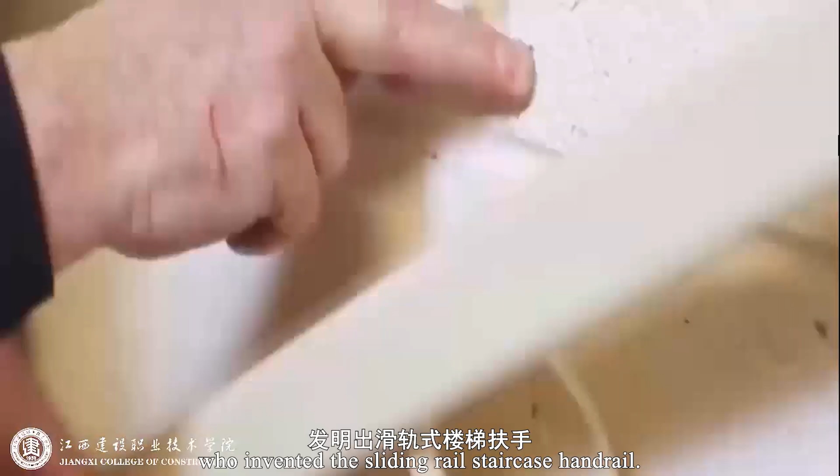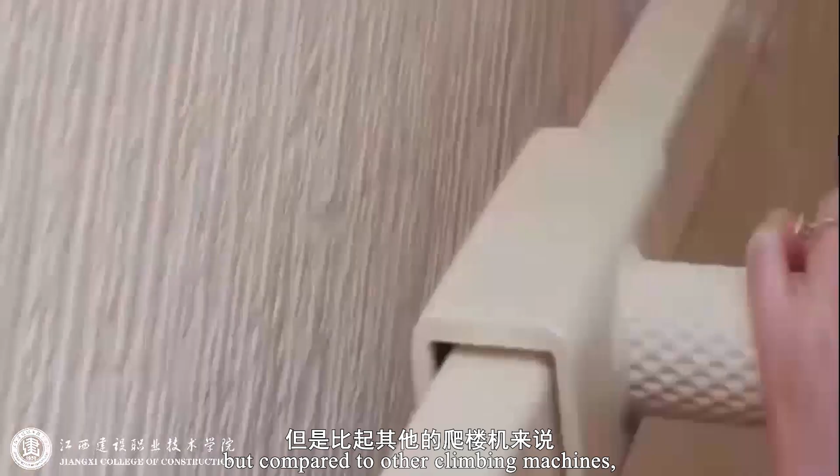There is a girl in the UK who invented the sliding rail staircase handrail. At first glance, her design is very ordinary, consisting only of fixed railings and movable handles. But compared to other climbing machines, it does not take up space and has lower costs.

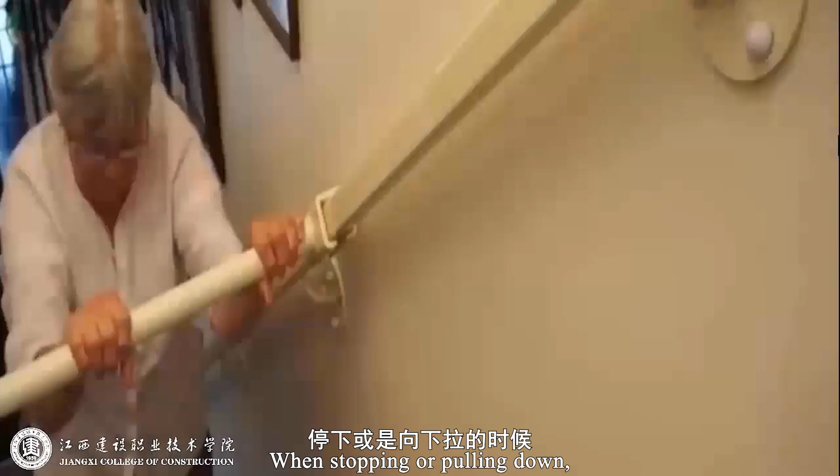When the elderly person goes upstairs and gently pushes, they can slide forward. When stopping or pulling down, the handle will get stuck and remain motionless, because there is a special card slot inside the handle, even if the elderly cannot stand firmly when going up and down stairs. As long as they hold the handle tightly, safety can be guaranteed.

The girl won the British Young Engineer Award from the British Medical Industry Association for this design. In fact, for handling the detailed structure of stairs, we have many other methods, which not only meet safety requirements but also take into account humanized design.

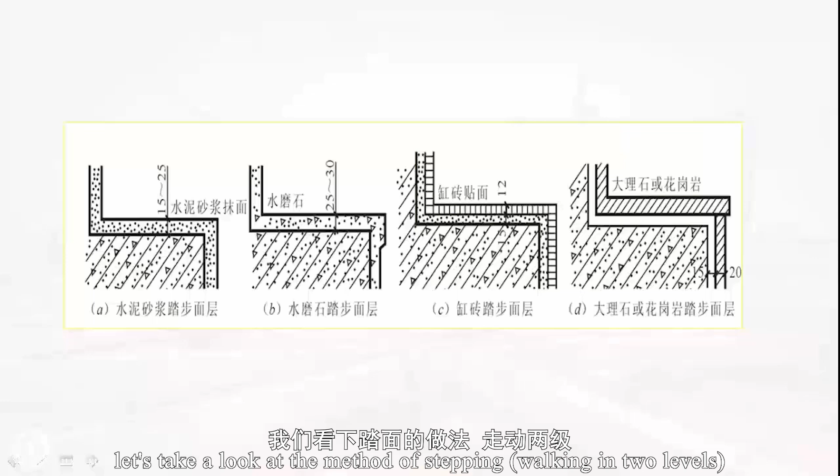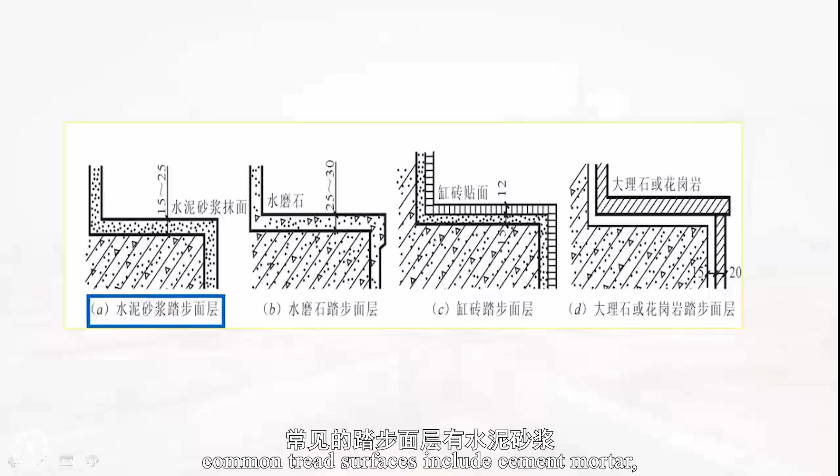Firstly, let's take a look at the method of stepping, walking in 2 levels. The method of stepping on the surface layer is generally similar to that of the floor. The requirements for the surface layer are wear-resistant, anti-slip, easy to clean, and aesthetically pleasing. According to the decoration standards and cost, common tread surfaces include cement mortar, terrazzo, floor tiles, various natural stones, and so on.

For stairs with high pedestrian flow, anti-slip and wear-resistant measures should be taken on the surface of the steps, usually by adding anti-slip strips at the corners of the steps. The 2 ends of the anti-slip strip should leave a gap of not less than 120 mm from the wall or railing board for cleaning and flushing.

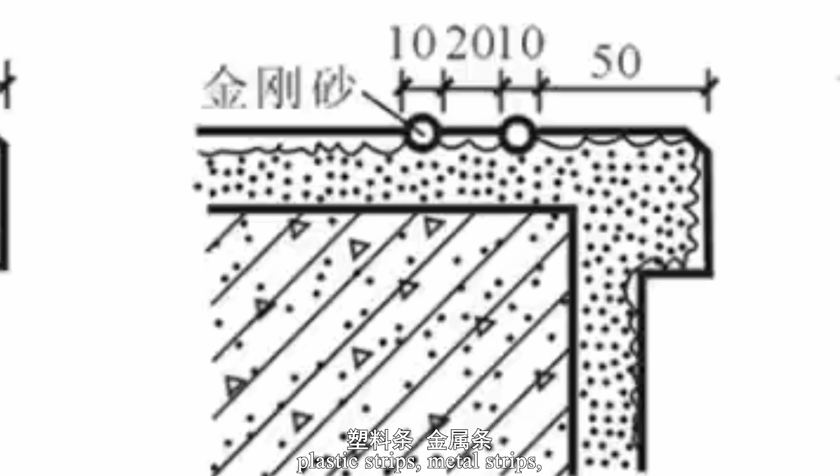The material of the anti-slip strip should be wear-resistant, beautiful, and comfortable to walk. It can be made of iron filings, cement, silicon carbide, plastic strips, metal strips, rubber strips, mosaic, and so on.

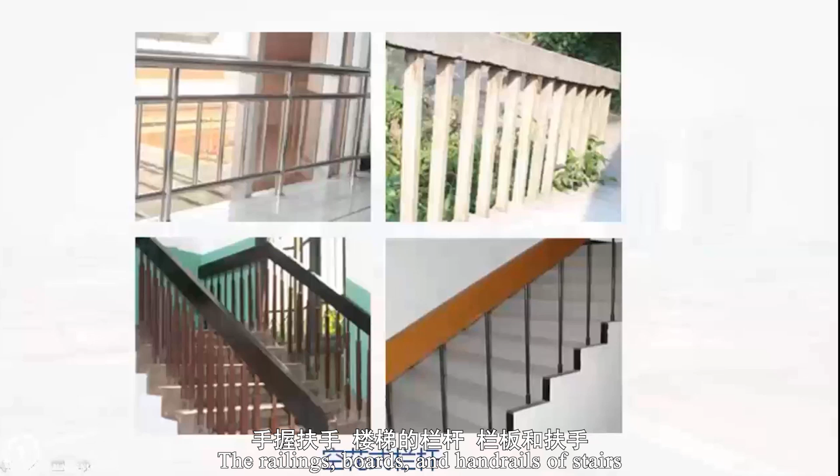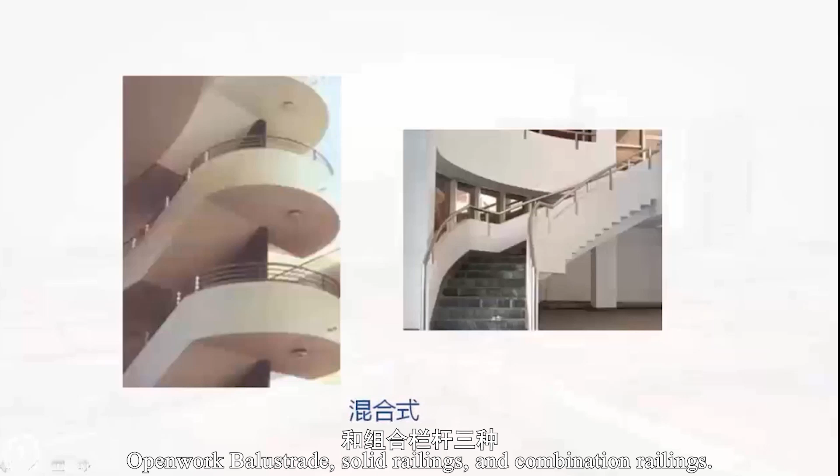The railings, boards, and handrails of stairs are safety facilities installed on the staircase, according to the width of the staircase, which are set on one or both sides, or in the middle of the staircase. They should meet the requirements of safety, sturdiness, aesthetics, comfort, simple structure, and easy construction and maintenance. According to their construction methods and materials, there are 3 types of railings: openwork balustrade, solid railings, and combination railings.

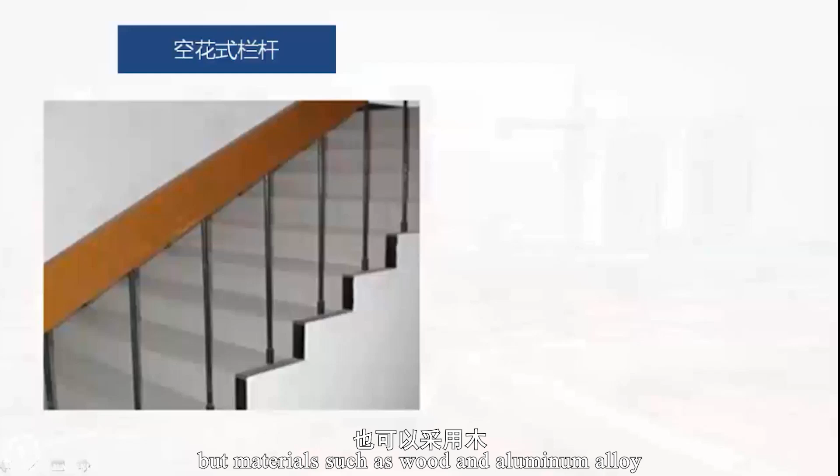Openwork railings generally use flat steel, round steel, and square steel, but materials such as wood and aluminum alloy can also be used for production. The size of the hollow flower formed by its rod should not be too large, generally not exceeding 110 mm.

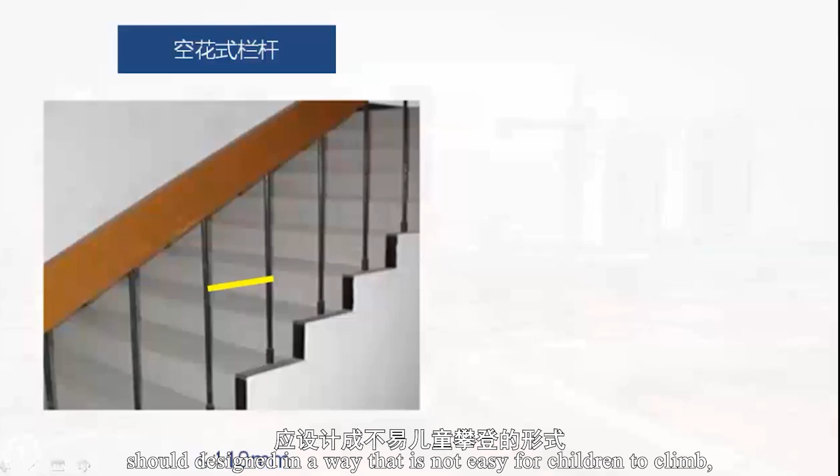For buildings with frequent children's activities, the division of railings should be designed in a way that is not easy for children to climb.

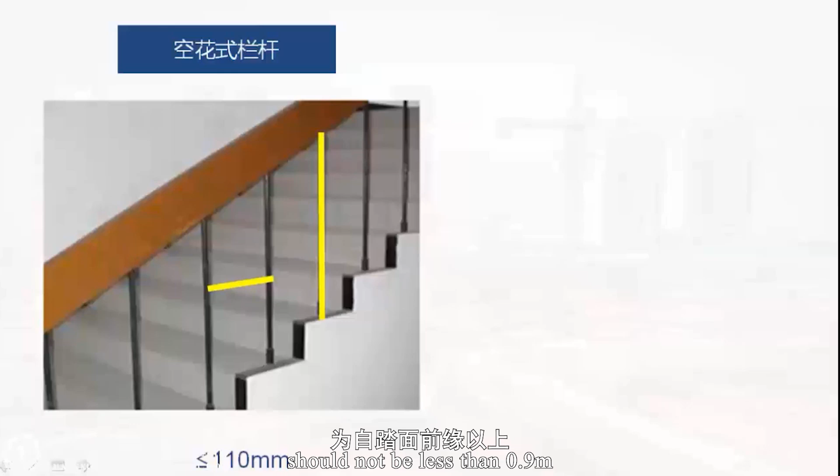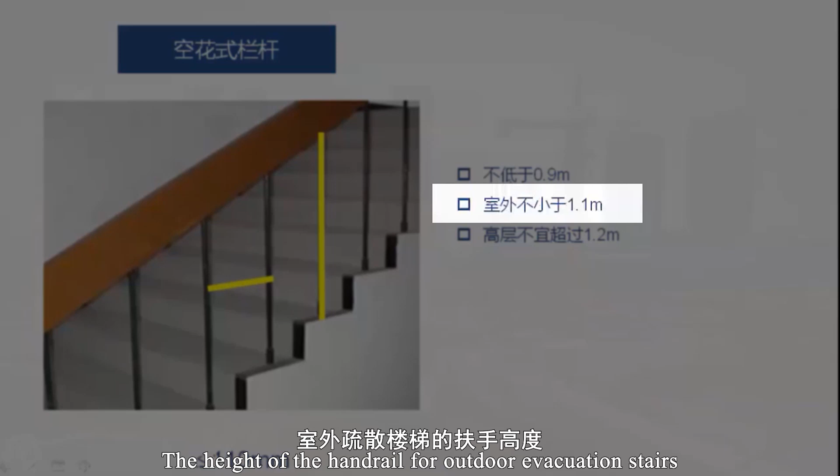To ensure safety, the height of the stair handrail should not be less than 0.9 meter above the leading edge of the stair tread surface. The height of the handrail for outdoor evacuation stairs should not be less than 1.1 meters, and for high-rise buildings, it should be raised appropriately, but not more than 1.2 meters.

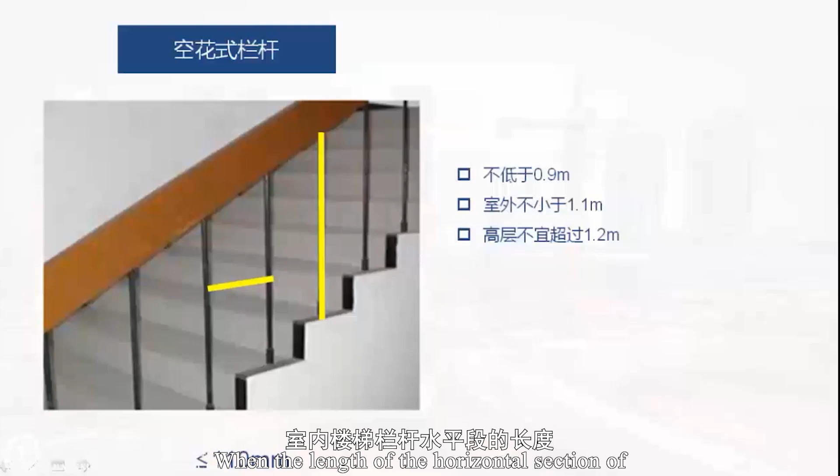When the length of the horizontal section of the indoor stair railing exceeds 500 mm, its height should not be less than 1.05 meters. The materials for the fence board are often bricks, steel wire mesh, cement plaster, reinforced concrete, and so on.

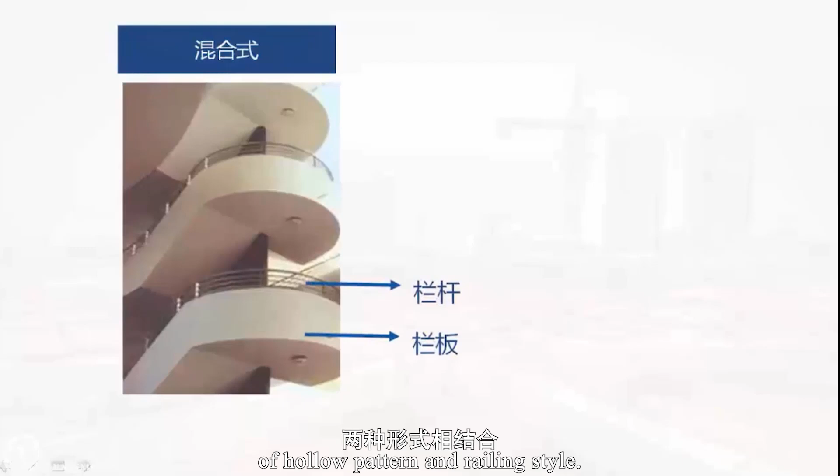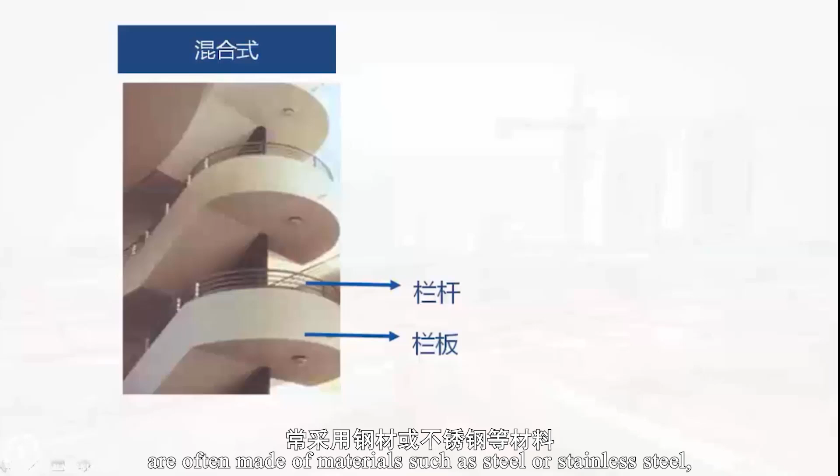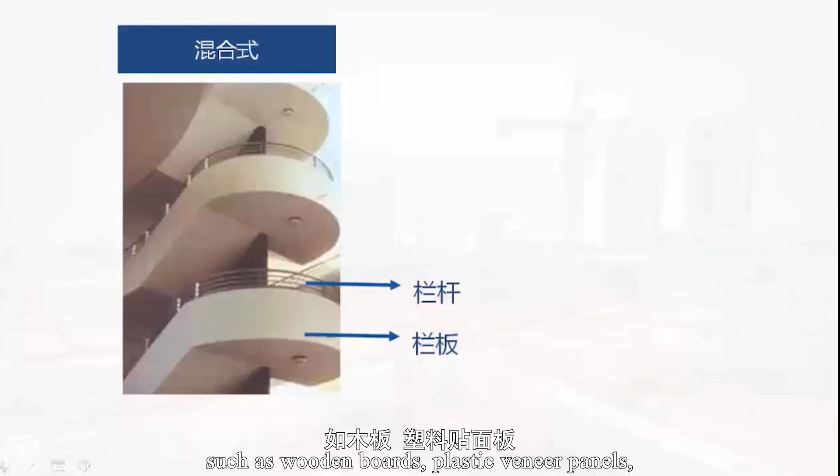Mixed type refers to the combination of hollow pattern and railing style. The vertical bars of the railing are often made of materials such as steel or stainless steel, and the railing board part is often made of lightweight and beautiful materials, such as wooden boards, plastic veneer panels, aluminum plates, organic glass panels, and tempered glass panels.

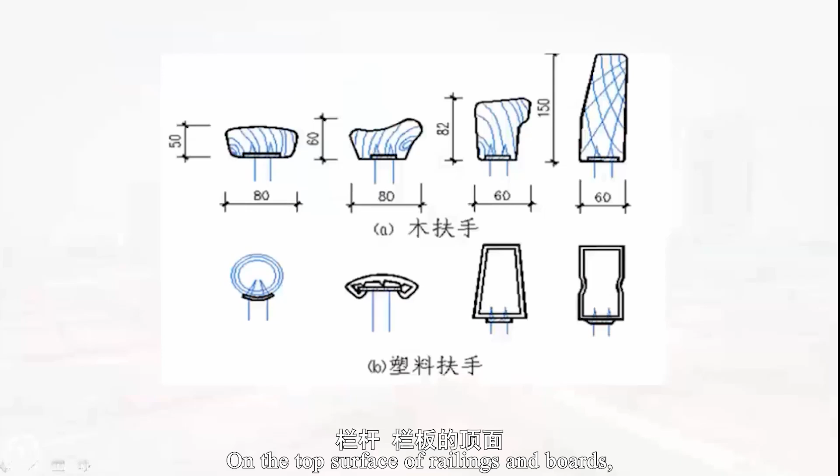On the top surface of railings and boards, we need to make handrails, and the cross-sectional size of the handrails should be easy to grip. The width of the top surface should generally not exceed 90 mm.

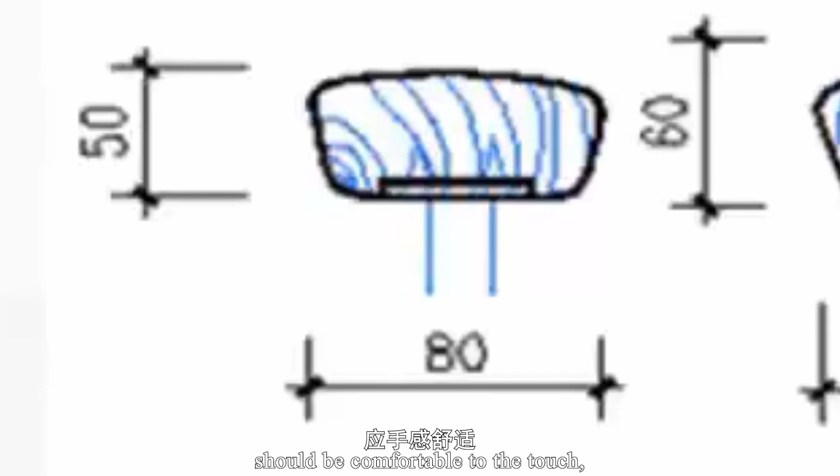The material of the armrest should be comfortable to the touch, generally made of hardwood, plastic, and metal pipes, steel pipes, aluminum alloy pipes, or stainless steel pipes. The handrails on the top of the railing boards are often formed by plastering with terrazzo or cement mortar, and can also be veneered with marble, granite, or artificial stone.

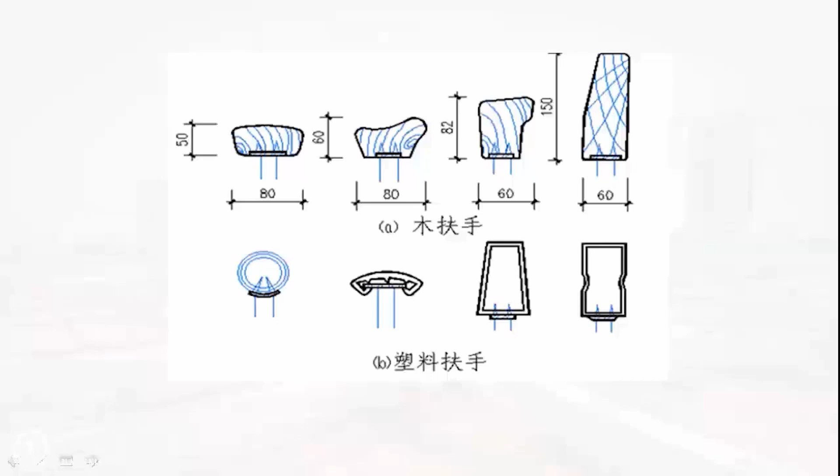So how can we place the railing on the stair so that it is both safe and aesthetically pleasing? Let's talk about their connection structure below. The connection between the railing and the handrail, as well as the combination of hollow and mixed railings.

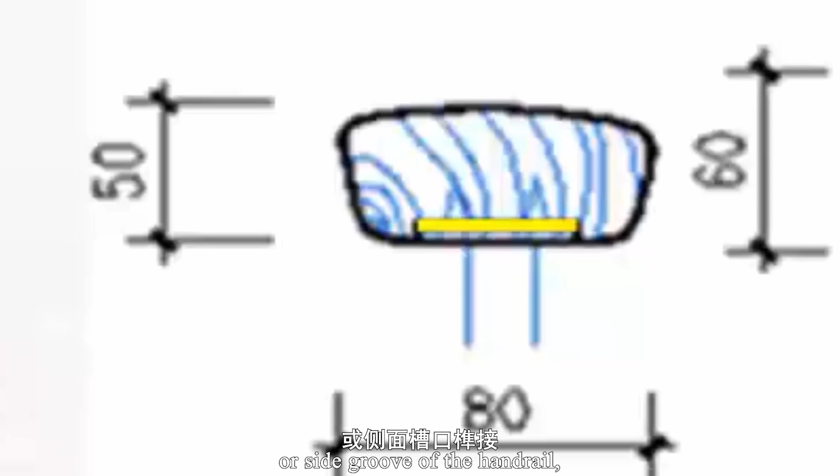When using wooden or plastic handrails, at the top of the vertical pole of the railing, full-length flat steel is generally installed to mortise and tenon the bottom or side groove of the handrail, and fixed with wooden screws. The connection between metal pipe handrails and railing vertical bars is generally made by welding or riveting.

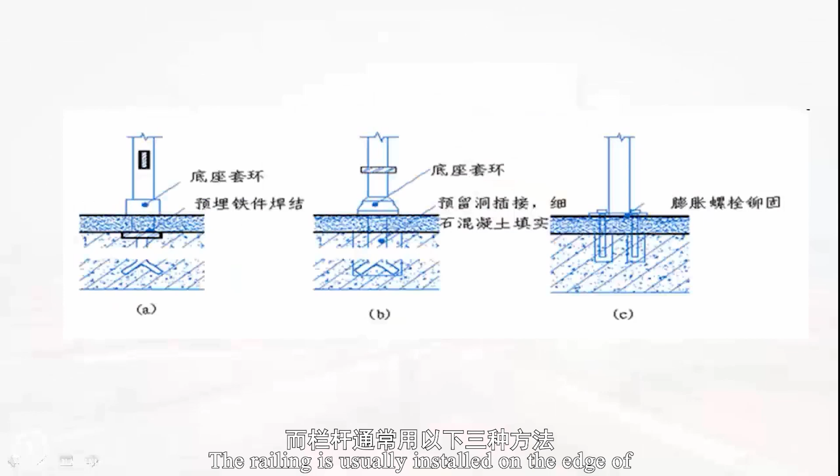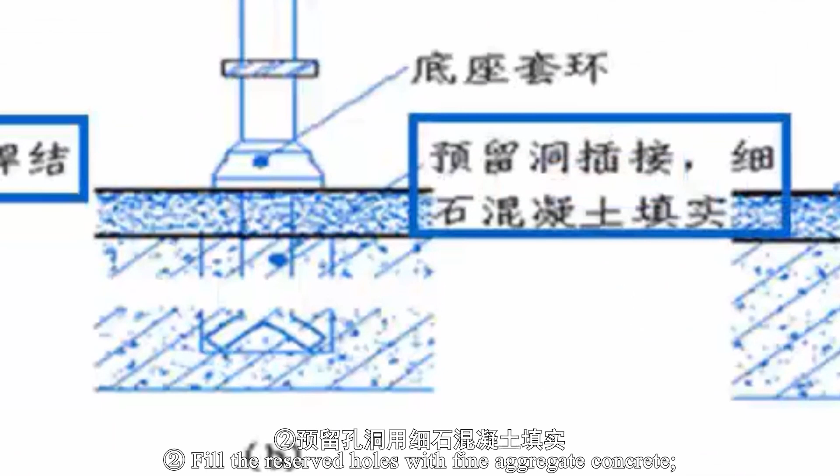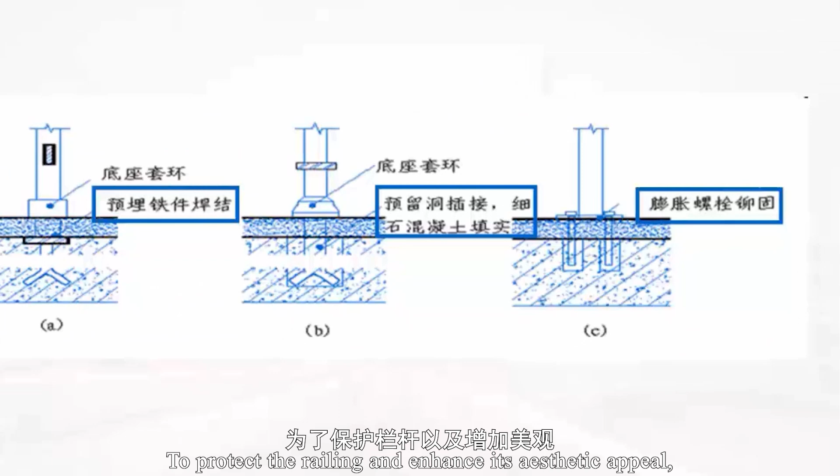The railing is usually installed on the edge of the step side or step surface in the following 3 ways. First, pre-embedded iron parts are welded at the corresponding position between the railing and the stair. Second, fill the reserved holes with fine aggregate concrete. Third, fixed with expansion bolts for drilling. To protect the railing and enhance its aesthetic appeal, a loop can be added underneath the railing.

In this lecture, we mainly discussed the detailed construction of stairs, including the treatment of surface layers, the construction of railings and handrails, and the connection methods of corresponding components. In terms of the detailed construction of stairs, we may be able to do more humanized design, which we can explore in future learning and work.